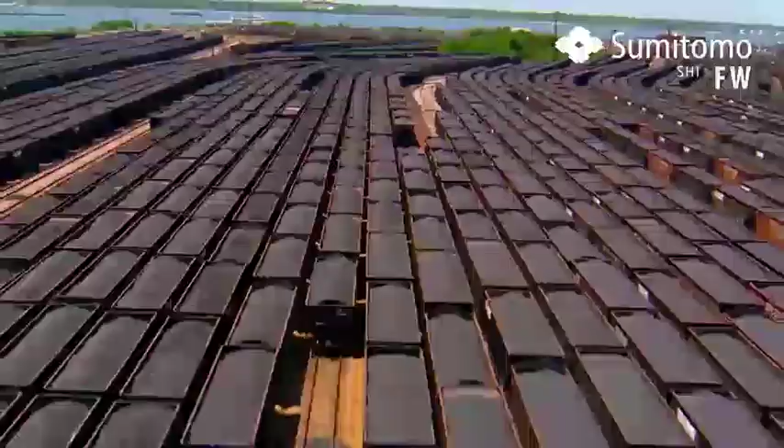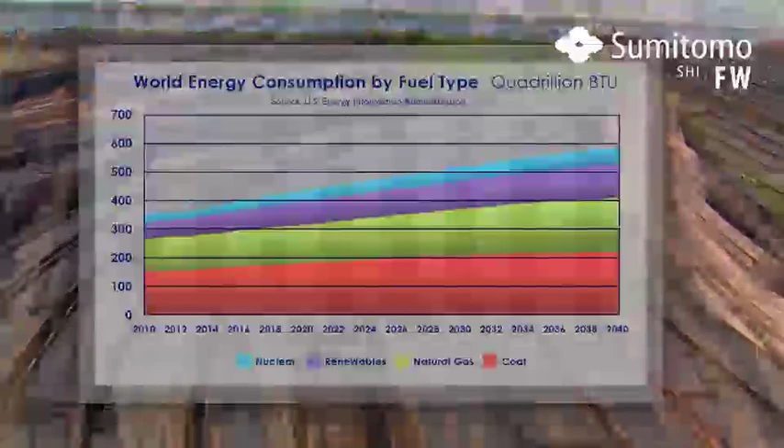Today, 40% of the world's power comes from one source, coal, and all practical scenarios for meeting our insatiable appetite for electricity into the future include a major role for coal power for two simple reasons. It is the most abundant and affordable energy source on the planet. But coal carries a significant environmental cost.

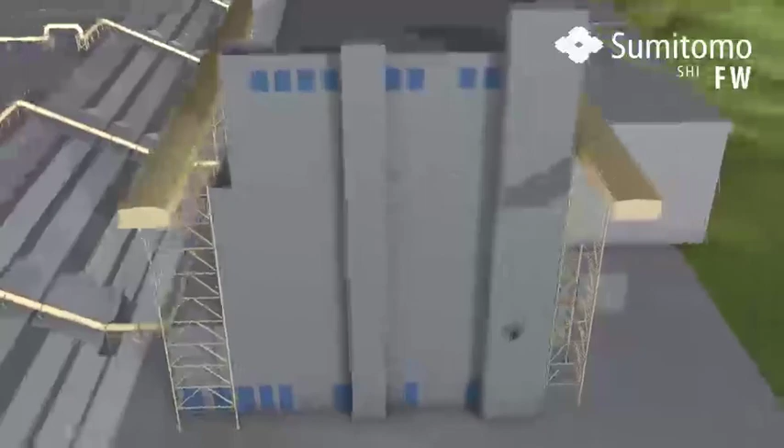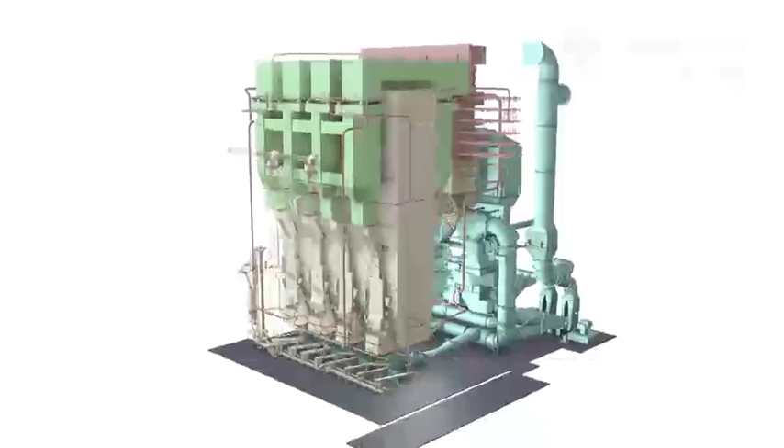A clean coal technology called circulating fluidized bed is proving to be a high-value solution for coal power generation. CFB technology is challenging conventional coal technology. Due to its fuel-flexible, low-temperature burning process, CFB technology can utilize low-cost coals, lignites, petroleum cokes, and carbon-neutral fuels like biomass and recycled materials to produce clean and economical power.

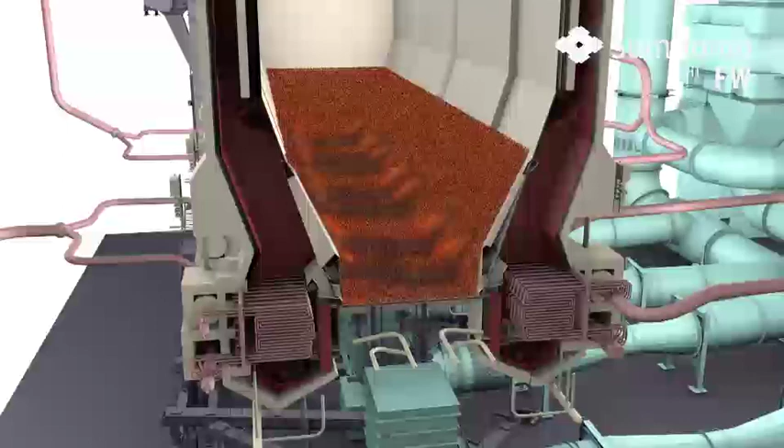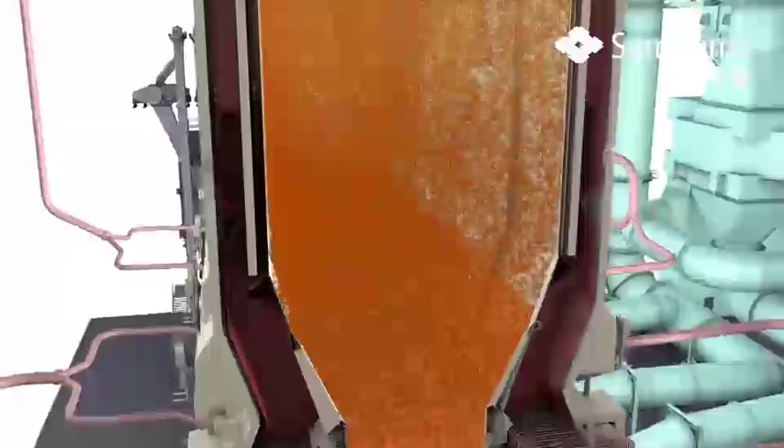Unlike conventional boilers that burn the fuel in a massive high-temperature flame, CFB technology utilizes circulating hot solids to cleanly and efficiently burn the fuel in a flameless combustion process. Since the fuel's ash doesn't melt, heat transfer surfaces stay clean, allowing the hot solids to conduct their heat efficiently throughout the entire boiler while minimizing fouling and corrosion. The payoff? High reliability, less maintenance, and reduced emissions.

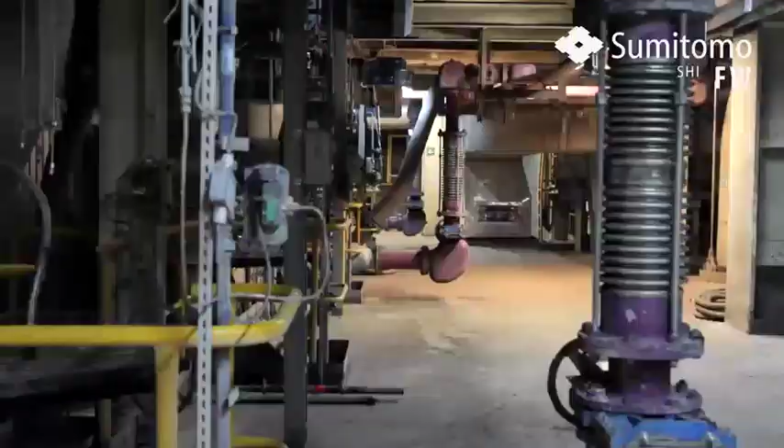From Asia to Europe to the Middle East, policymakers and utilities have been turning to CFB technology. In Turow, Poland, the local power plant had been burning low-quality brown coal with pulverized coal boilers. For nearly 4 decades, the region's environmental conditions had deteriorated badly.

Then, between 1998 and 2004, Sumitomo FW replaced 6 boilers with their CFB technology. The environmental impact was immediate and impressive. Repowering the Turow power plant with 6 Foster-Wheeler circulating fluidized bed boilers improved the environmental quality in the region tremendously.

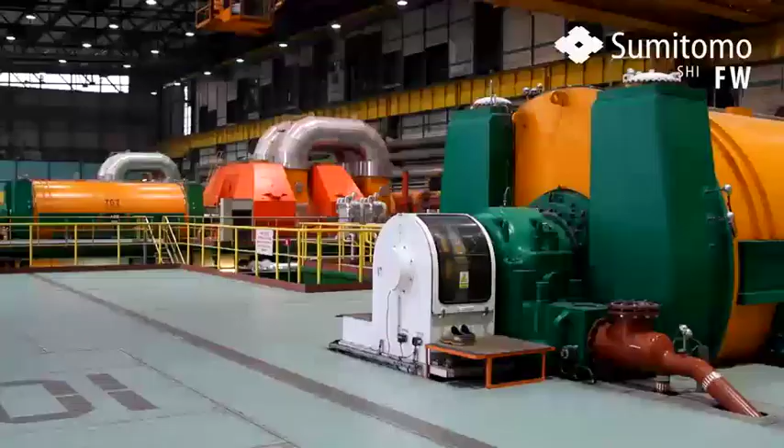The CFBs reduced the sulfur dioxide emissions of the Turow plant by more than 3 times, reduced nitrogen oxides emissions by more than twice, and decreased particulate emissions tenfold. At the same time, the Sumitomo FW CFBs improved the reliability of the plant and lowered its maintenance cost.

A big benefit for the CFB is that they do not require coal mills or pulverizers, which are very expensive to operate when firing low-quality fuels.

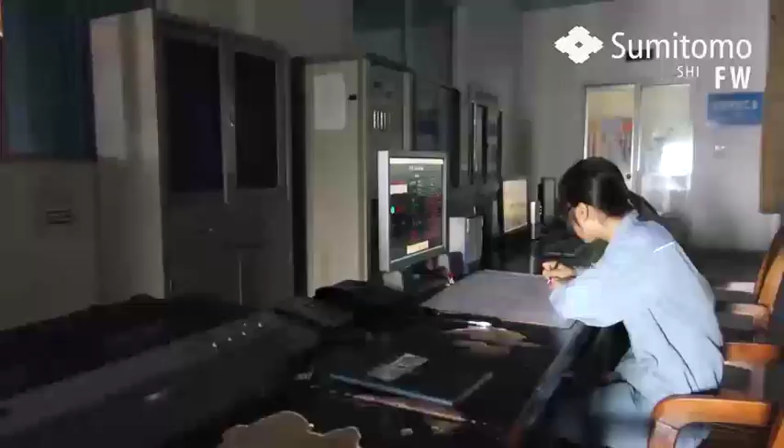But while environmental issues are a growing concern, many global energy and industrial companies face a more basic question: the need for proven reliability. That's the challenge faced by leaders of China's largest oil company, Sinopec, in Maoming, China.

Our Maoming refinery produces high-sulfur petcoke, which has a high energy value, but it's very difficult to burn cleanly and reliably. We also needed to burn coal for operation flexibility, so fuel flexibility was important to us.

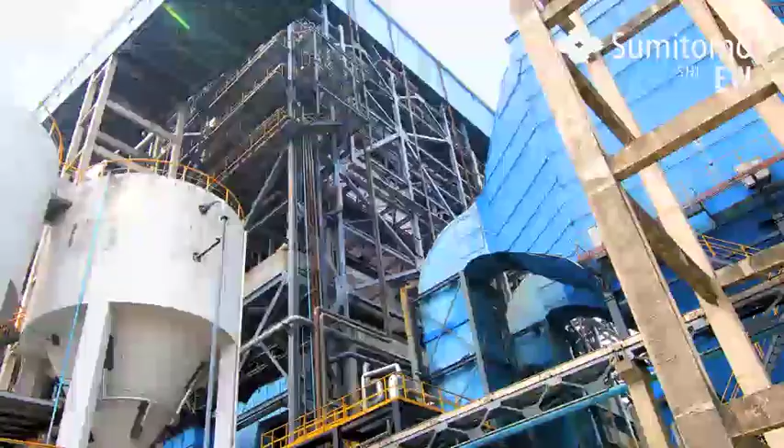Sinopec Maoming installed 4 Sumitomo FW CFB boilers, 2 for steam and power at its ethylene plant, and another 2 for its refinery complex.

We chose Foster-Wheeler's CFB technology for its wide fuel flexibility, high reliability, and clean burning process.

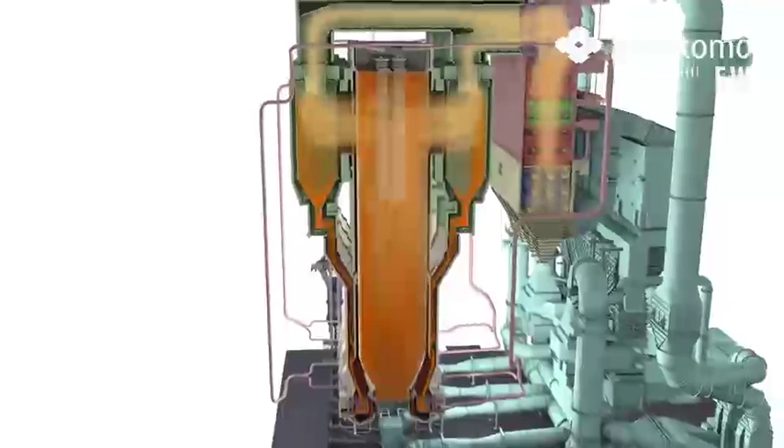The slow-burning method allows CFB technology to cleanly burn virtually any combustible material, from petcoke and lignites to even biomass and waste. It's a major advantage over the limitations of conventional combustion, the ability to switch fuels at any point in the future. Right from the start, Sumitomo FW CFB boilers proved reliable.

During their first 3 years of operation, each unit at the ethylene plant ran for more than 900 days, about 2.5 years, without a single unplanned shutdown.

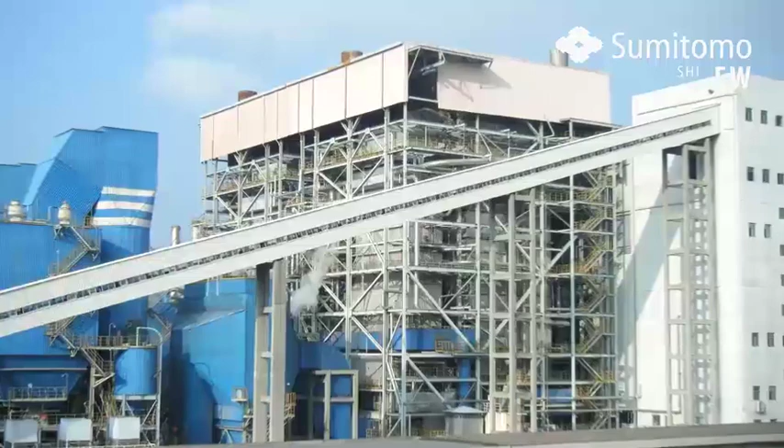We were honored when Sinopec presented us with an award for setting a new record for long-term operation. In total, Sinopec has purchased 26 Sumitomo CFB boilers for their refinery and petrochemical plants throughout China, burning both petcoke and coal.

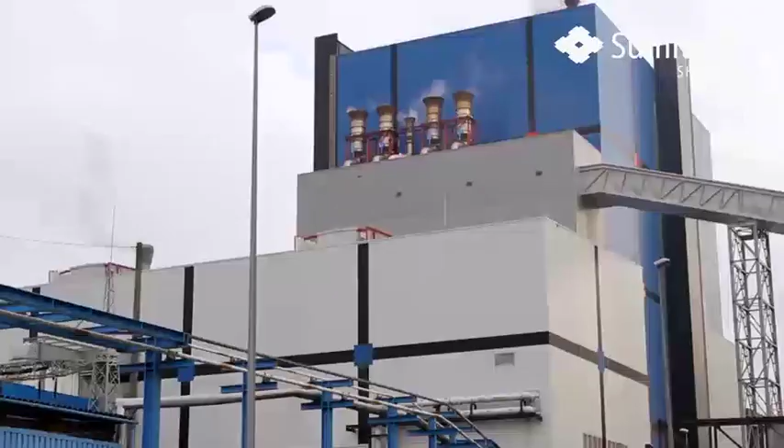On the other side of the globe, the cutting edge of CFB technology has proven itself by reliably producing power in Poland since 2009. Lagisza was the first supercritical CFB plant in the world, attracting attention from many utility executives. It was the largest and most advanced CFB in the world.

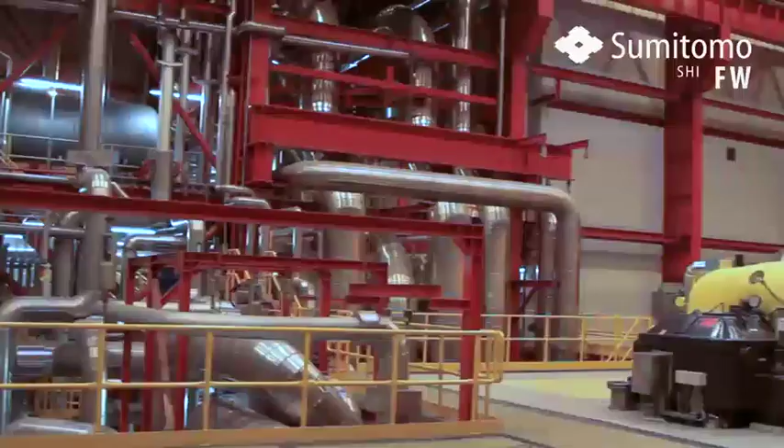There is no denying it, we did feel anxious about the startup of the largest and most advanced CFB boiler in the world. But when the unit came online in June 2009, it had a remarkably smooth commissioning process, despite being the first of its kind. Of course, the credit for the success goes also to the employees of Sumitomo SHI FW, who stayed with us during the entire startup and commissioning period.

For the team at Lagisza, the clean burning process and the fuel flexibility are already paying off. The CFB boiler does not require any additional gas cleaning systems, which reduces the investment costs. The fuel flexibility provides us with the ability to procure fuels from a wider market, allowing us the potential of saving significant operating costs over the life of the plant. It also allows us to use biomass and waste materials like coal slurry for improving our environment.

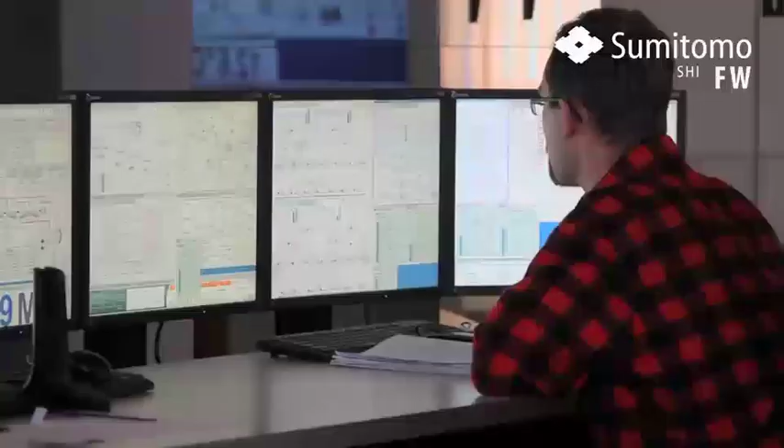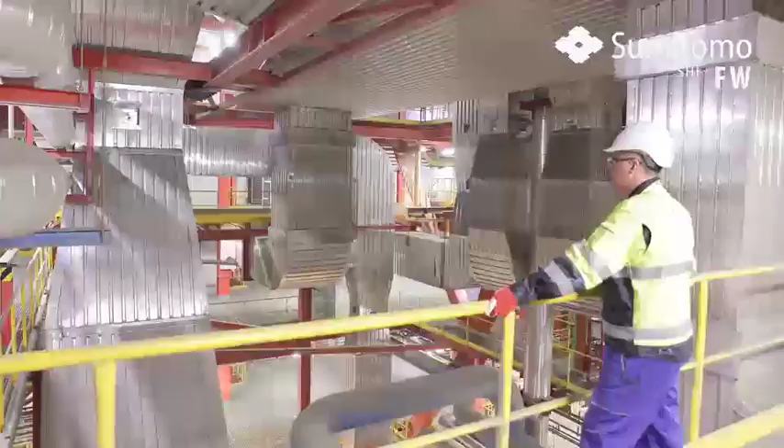And companies from all over are still coming to see what they are doing right. Since the Lagisza plant went into operation, we have had a stream of visitors to the plant still after 3.5 years of operation. They come from all over the world to see the most advanced supercritical CFB power plant, which makes us proud.

Lagisza has recently lost its state-of-the-art title to the green power plant in Samcheok, South Korea, a half a world away. Now in full commercial operation since June 2017 in Gangwon-do Province, the Samcheok Green Power Project marks a significant development in clean coal power.

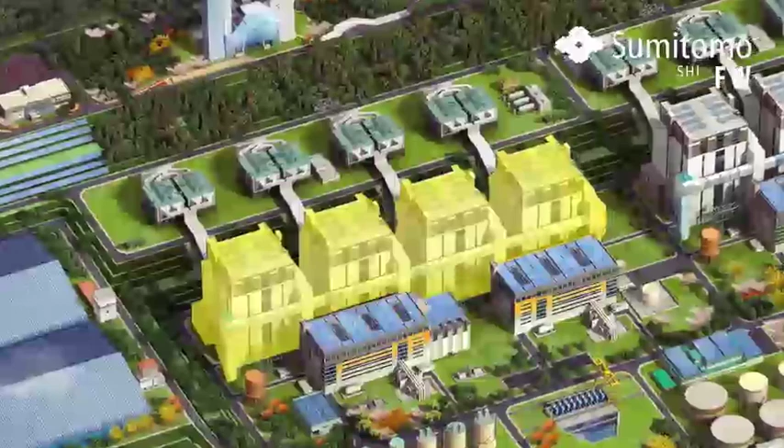At the heart of the plant is 4 550-megawatt electric ultra-supercritical CFB boilers from Sumitomo FW, producing 2,200 megawatts of electricity from coal, biomass, and recycled materials, setting a new standard for clean, highly efficient, large-scale power generation. For Korean Southern Power and government executives, it was fuel flexibility that made the choice for them.

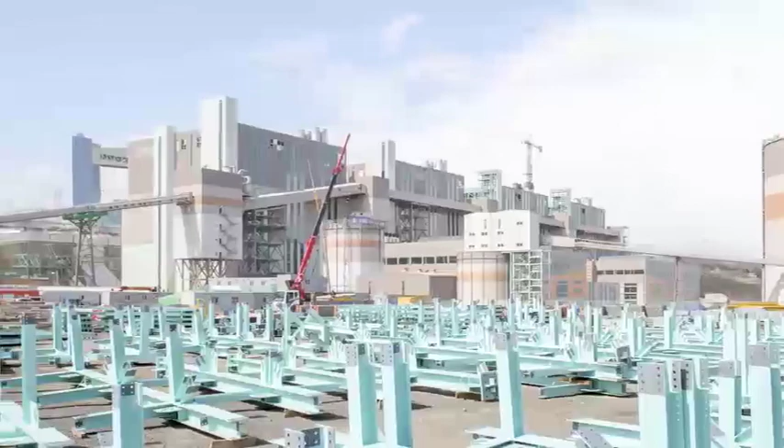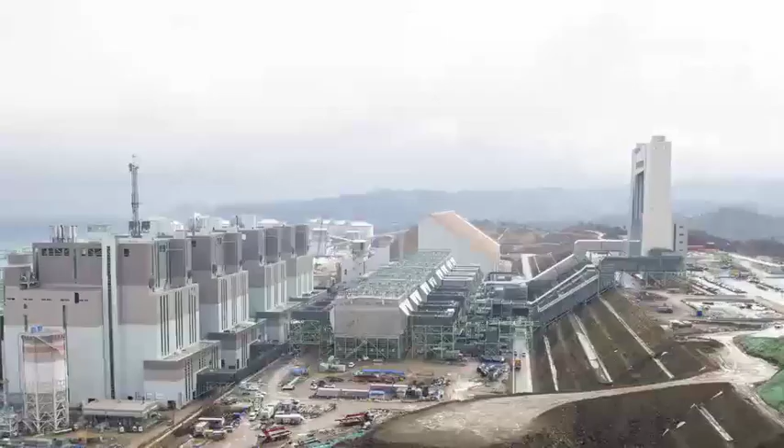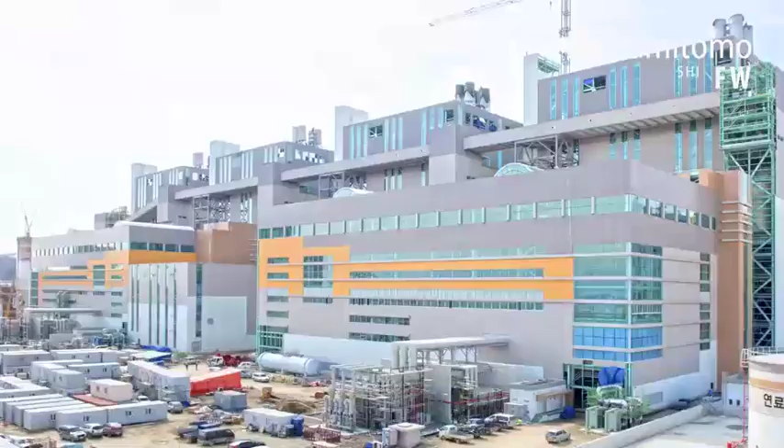When the price of coal was low, there was no problem. But as the price began to rise, it had a negative impact on the Korean economy and exports. This is when I began thinking about using low-calorie coal. This was a key factor behind my recommendation to the government to select CFB technology for the Samcheok Green Power Plant project. As with Lagisza, Samcheok had a smooth commissioning and is now in successful commercial operation, despite utilizing highly advanced, first-of-a-kind CFB technology.

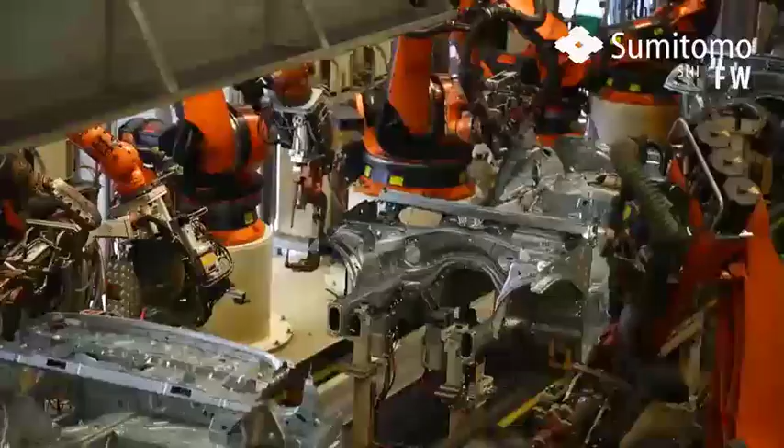Energy will continue to play a vital role in our future. The technology choices we make today are long-lasting and important to put us on a path of clean, sustainable, affordable energy.

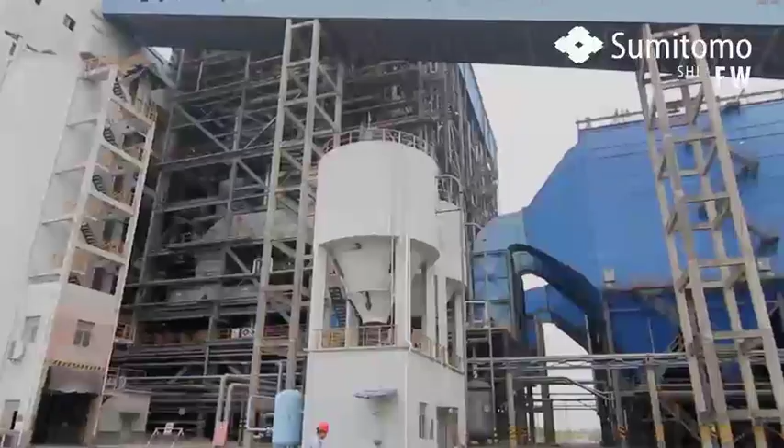The 4 Sumitomo SHI FW CFB boilers operating at our Maoming refinery and petrochemical facility have proven to be highly reliable since their startup in 2005. They have maintained an availability above 95%. And we could sense the passion in their employees.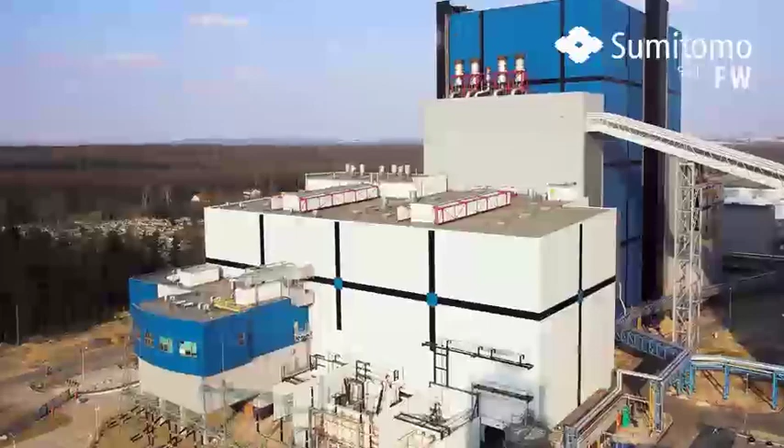This made me confident about working with them. I'm pleased to say that Foster Wheeler's CFB is running very well, and the commissioning of the boiler was smoother than we expected. Foster Wheeler has the most experience in CFB technology firing 100% petcoke.

We'd gladly recommend their CFB technology to others. Foster Wheeler's CFB technology is the best choice for producing power from low-quality fuels. And I would recommend their CFBs to others. I was convinced that I'd never regret choosing Foster Wheeler, and I was also determined that I'd never let Foster Wheeler regret choosing us as a client.

Because of its clean-burning fuel-flexible process, CFB technology is being selected more and more for utility power generation, and Sumitomo FW is leading the way.